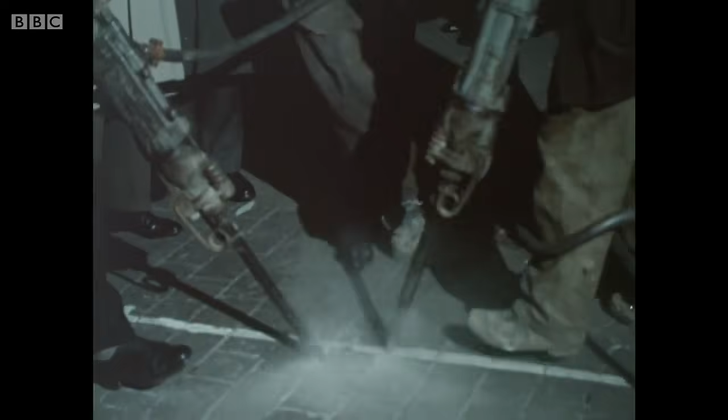With the first bite of the pneumatic drills, the TV cameras were rolling. But that night in Oxford Circus, only a small crowd looked in. It was the weekend, most people were out of town. And the models who saw it all, in the fashions of 6 years ago, couldn't talk.

So an operation began which had been on the drawing board for 18 years. It was, of course, raining. This was D-Day.

The Tube is a bit of London's pride that's been handed down to us. Back in 1863, when London pioneered underground railways, it was properly the wonder and admiration of the world.

It still might be in 1969, if there weren't so many of us. Too many people for the system to digest. No strap hanger, and none of the rush hour crowds pressing wearily over the pavements above, needs telling that today the Tube is bursting at its seams.

It's the same problem which London, paradoxically, has inherited in the drainage system. But in this overcrowded metropolis, we have a national tradition of adventuring against difficulties. In Victorian times, the great engineer Sir Joseph Bazalgette enclosed the Thames inside the embankment and built the main sewers to support 4.5 million people—essentially the same system trying to cope with 10 million today.

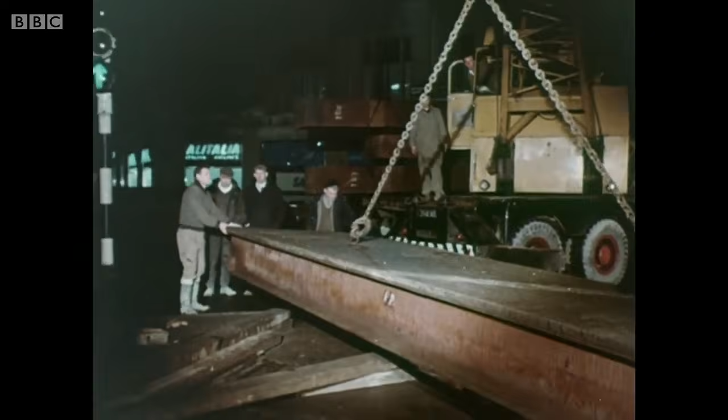In the 18th century, we established the canals, waterway roads. In the 19th, we led the world with iron horses. In the 20th, the technological age, it may be that the descendants of the Industrial Revolution are not so unworthy after all. Look at this, London.

Here's the plan, conceived decades ago, to relieve the indigestion of London's traffic by tunnelling a new tube line from Victoria to Walthamstow. Twin tunnels of 10.5 miles to link 4 mainline termini—Victoria, Euston, King's Cross and St Pancras—to slash right across the existing system and bring the underground to a new region in the northeast.

By any standard, it was a hell of an undertaking. No one knows all the secrets which lie under London's streets.

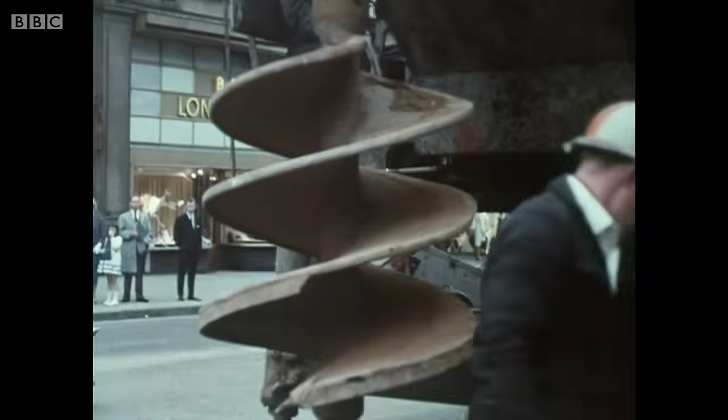The advantage the new pioneers had, in place of the picks and shovels, hammers and anvils of their forebears, were the machines of modern technology. But when the first great drilling rig arrived for the start of the work in Oxford Circus, one of the belly buttons of London, it was still the beginning of another brave adventure. In the autumn of 1962, the first phase was something of a small miracle.

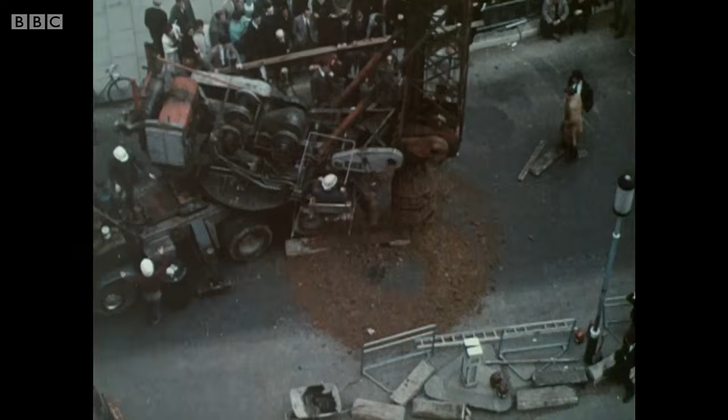Before they could begin mining underneath, they had to erect an umbrella, a steel overpass for the traffic streaming overhead from the 4 points of Oxford Circus.

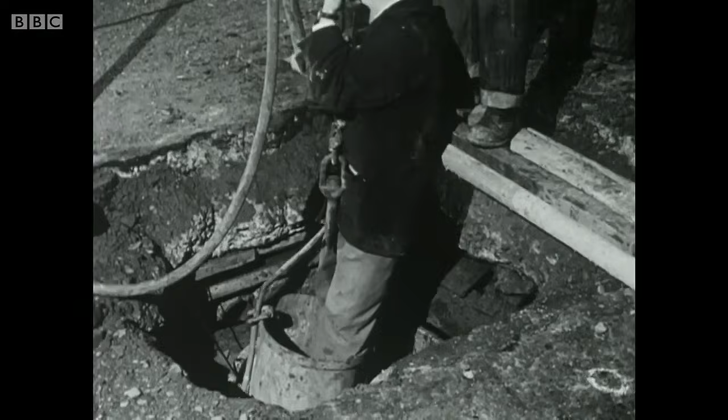For 60 years, a period as long as Queen Victoria reigned, rarely had anyone probed deep into the guts of central London. No one was even absolutely sure where all the power cables, gas mains and sewers were sited. Some went even unmapped. But engineers playing with the stuff of the earth have to be gamblers.

Gamblers with a system, but keeping their fingers crossed every time they go down for an inspection. 25 holes had to be drilled and filled in 18 days, 3 feet in diameter, up to 50 feet deep, to get a footing in the London clay.

As they were completed, the boreholes were sealed. Oxford Circus was almost ready for the opening of its steel umbrella.

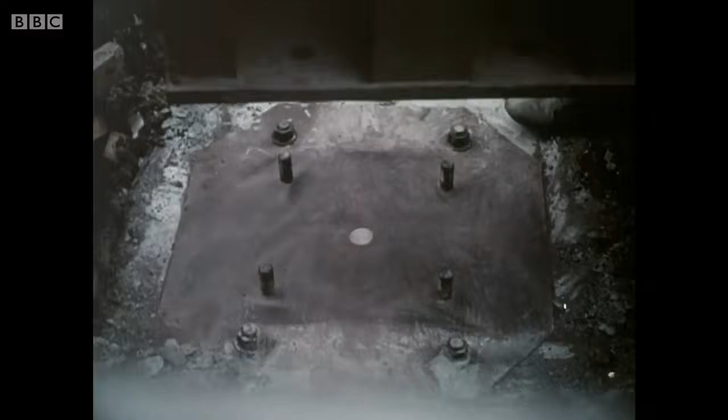To the outsider looking in, it all seemed chaos. Civil engineering usually does. But in fact, brute force and the muck of it is combined with a pernickety and almost an embroiderer's precision. Isolated in an island of noise, encompassed by the swirling West End traffic, the surveyor and his assistant worked with the calm concentration of an operating theatre.

They had to. The steel deck sections had to fit together without nuts, bolts or rivets, like a jigsaw. Otherwise, it would be a spillikins. They got it right to fractions of an inch.

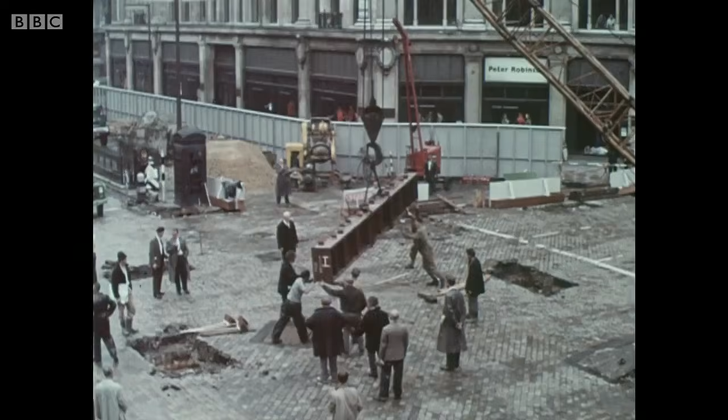Came that August bank holiday of 1963, when traffic and pedestrians were diverted. On the Saturday, the steel parts of the new umbrella, colour-coded and numbered, were ready. The target was that Oxford Circus had to be open for traffic by 6:30 a.m. on the Tuesday. Here's the story of a mere 65 hours.

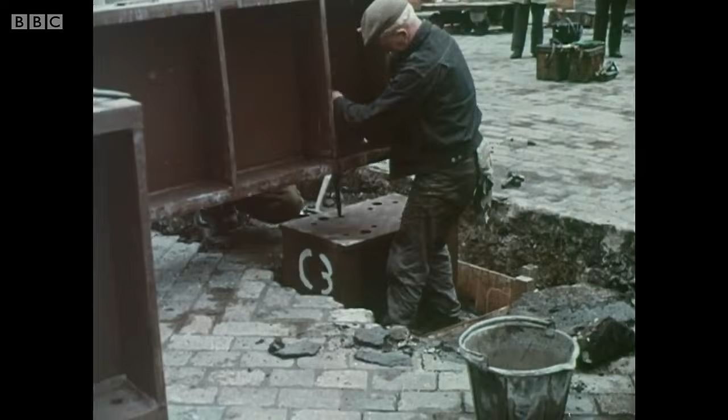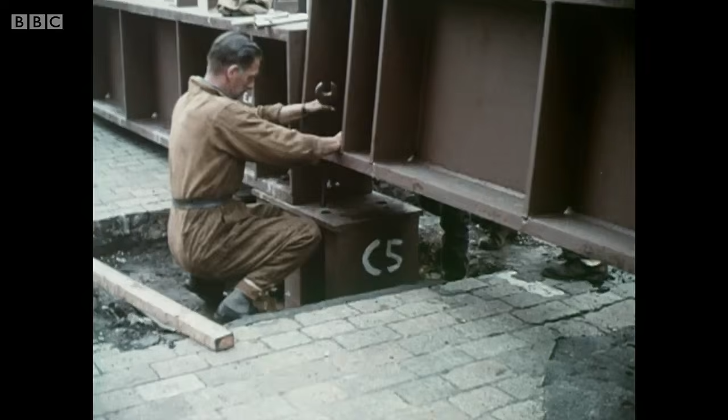The first girder went into position at 3:20 p.m. on the Saturday. Later that afternoon, the centre rib was nearly complete. At 7 o'clock, the first deck section went in.

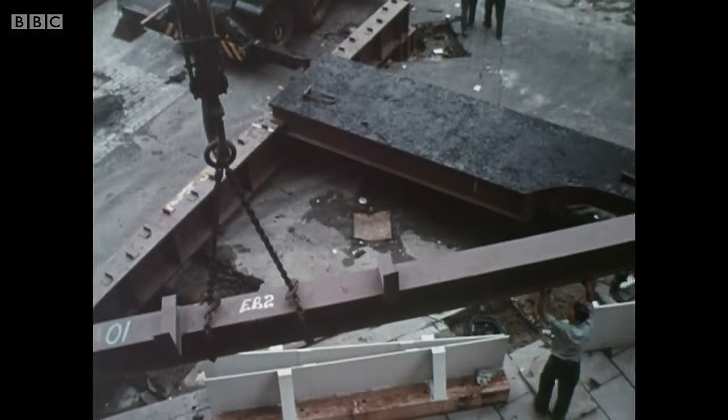The night shift took over, and the sections continued to fit. On Sunday morning, 11 a.m. exactly, half the umbrella was complete. 43 hours to go.

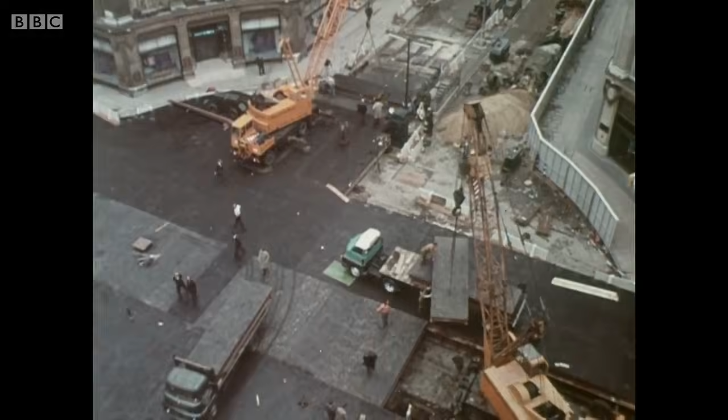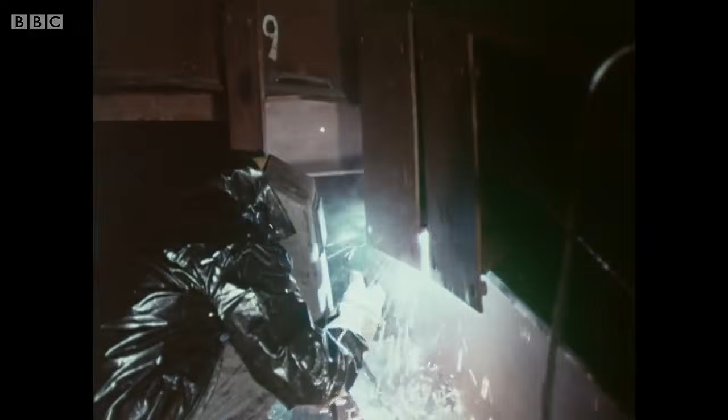Sunday night, 30 hours and 40 sections to go from midnight. The one that doesn't fit has got to be this one. It's the last, and it does. 245 units in position in an average time of 11 minutes each. Just after midday on the Monday, with 18 hours to finish off the details, it was all over, bar the congratulations.

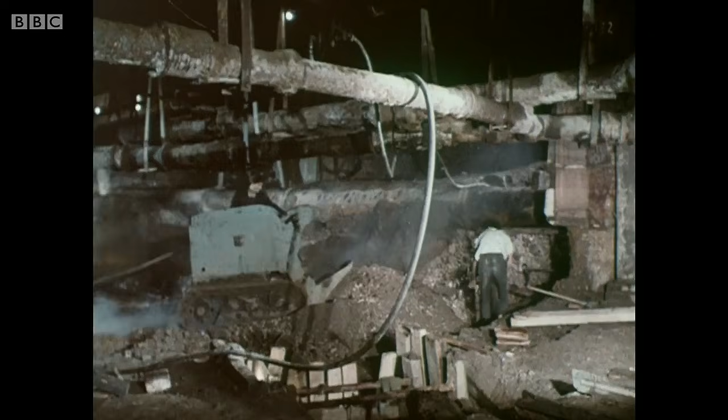Under the umbrella, with the traffic swarming overhead, this is what they found: a maze of pipes and conduits, power lines and drains. Just 2 feet 6 inches under the road surface, London spilled over like a plate of spaghetti. From London on top to London underneath.

While they got to work at Oxford Circus, constructing the new ticket hall, escalator shafts, stations and subways, all along the line, men and gear were lowered down working shafts dug to tunnel depth. They did their shifts in small gangs, 70 feet below the surface, in a secret, sweaty world of their own. Like moles, they tunneled towards the next gang along the line.

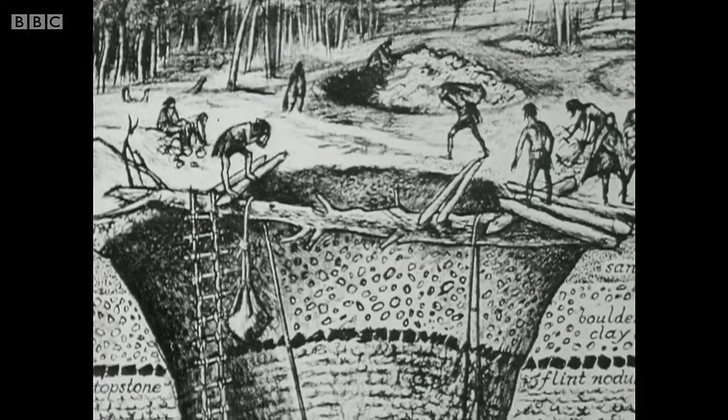Nothing new in man's instinct to tunnel, mucking out mud, shifting soil to the surface. It's been going on since the Stone Age. It's just that the methods have changed somewhat, the costume. The Stone Age tunnellers at Brandon in Suffolk used the tines of deer's antlers to scratch flints for their arrowheads out of the chalk.

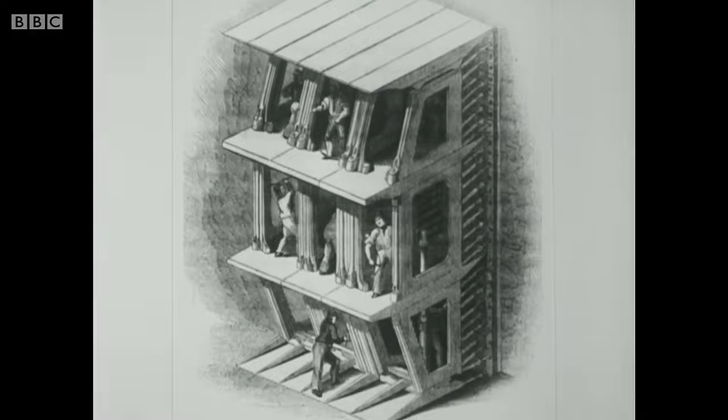Tunnelling through London clay with some sort of digging shield has been practical since 1825. The first one had 12 frames side by side with 36 cells, in each of which a miner worked at the face. We've advanced since then.

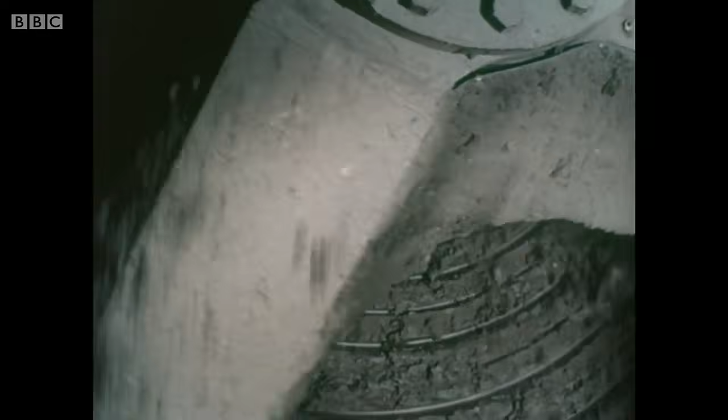A gang of 6 men working a modern rotary digger can clear a running tunnel through the clay at the rate of 2 inches a minute. The machines, lowered down the shaft to be assembled on the working site, can steer their tunnel accurately within a tolerance of 1.5 inches. They cut exactly to the diameter required for the passage of the trains.

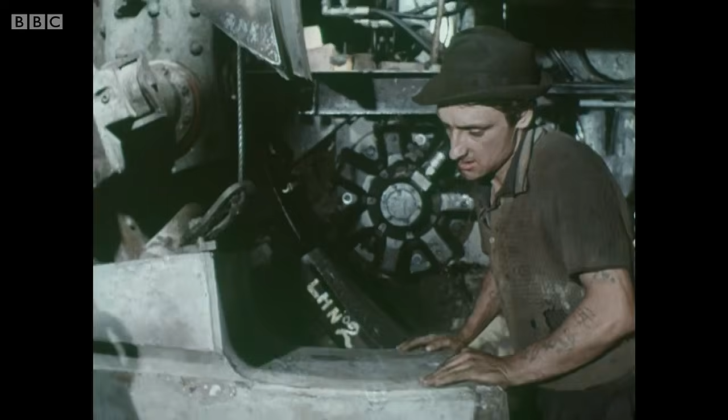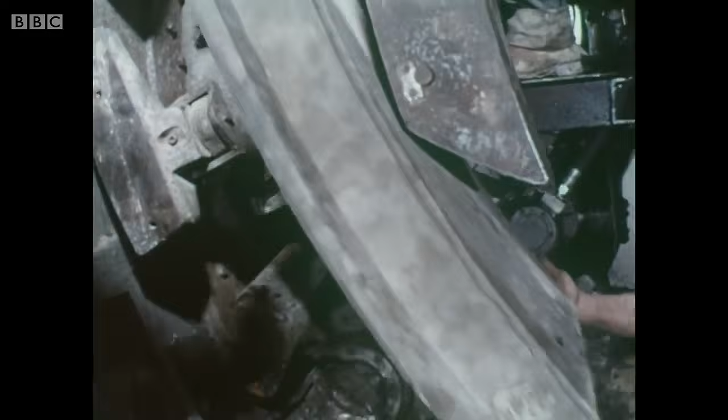London clay, famous in tunnelling history since the 1890s, is the ideal medium in which to build a new tube railway. But it isn't self-supporting for very long, so the tunnel lining ring must go in quickly behind the digging shield, 1 lining ring every 2 foot advance. Once every 15 minutes, the miners assemble a self-supporting ring of concrete behind the digger. No nuts or bolts, they just pack the segments under power and pressure into place.

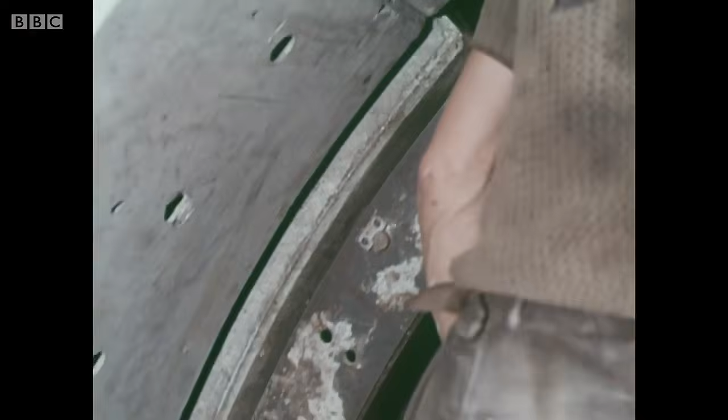The miners are specialists, working as a team, in demand the world over where there's a tunnel to be dug. They stick at it for 8 hours a shift, sometimes working 2 shifts in succession, so that they only have to have 1 bath for double money. They earned a lot of money, and they sweated their skill for every penny of it. Think of them when you yourself are riding in comfort through the shotgun tunnel of the new tube.

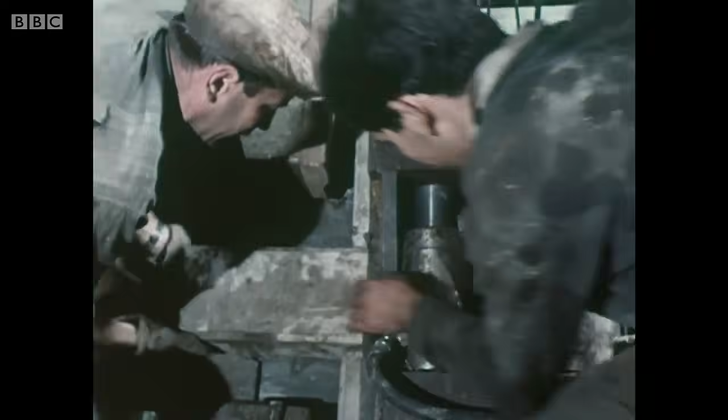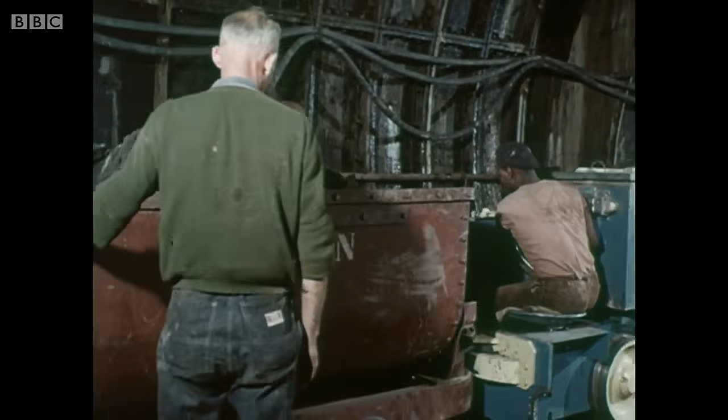Behind the shields, cutting the tunnels, there are long sleds and belt conveyors to get rid of the spoil. If you dig a tunnel, as any rabbit knows, you must get rid of what you kick out of it. Muck, that's what they call the clay, comes out fast. Skip trains haul it away from the diggers and a belt conveyor to the surface.

Where does it all go to? It's being dumped in worked-out gravel pits, in clay quarries, and even used to make bricks. It's probably true that what makes the land of Britain has been pushed about by industrious humans more than any other country in the world.

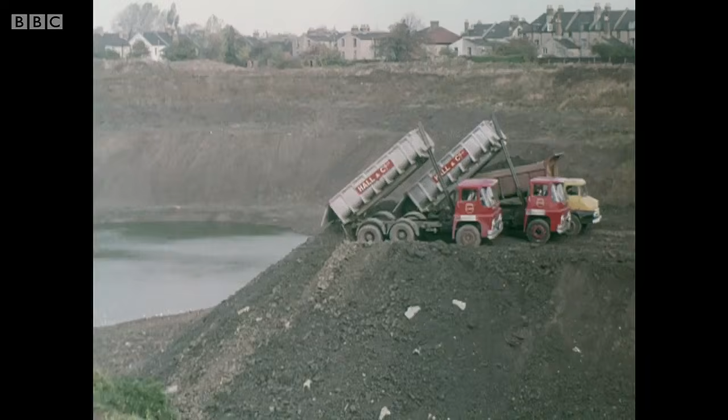And there's why we're doing it again. Underneath, the miners are clawing at the tunnel face to make a new artery for London. The first breakthrough, the meeting of 2 tunnels, is coming about.

The engineers, those cool men, are satisfied. Somebody else seems rather pleased with the result.

Running tunnels are best cut with mechanical diggers. Big diameter tunnels with cast iron linings are dug more economically by hand. Stations have big diameter tunnels.

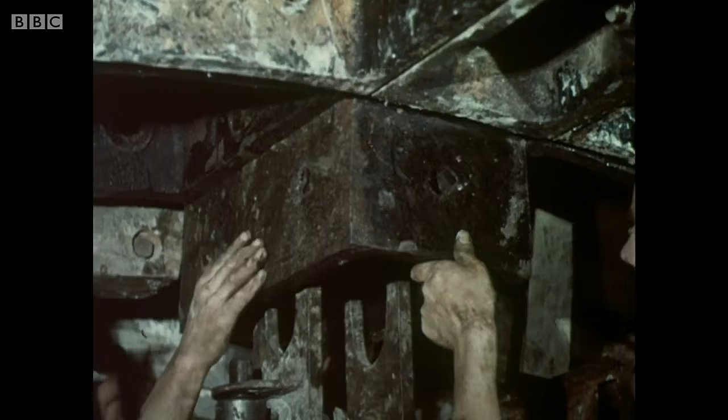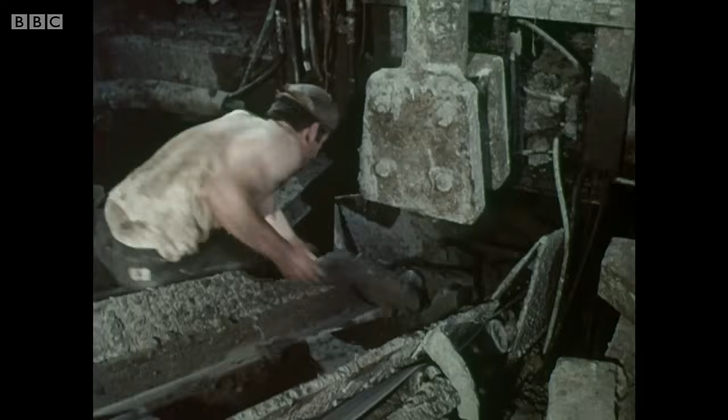Where did they come from? Where have they come from so often in the story of these islands? Sons of Ireland, almost all of them. Descendants of the formidable navvies who dug the canals and laid the railways. The men who astonished Europe when the canals were cut in the 19th century by cooking steaks in their spades over their bonfires. Back again, better paid, with pneumatic drills to help, to mine the new Victoria line. Men with big appetites, mighty thirsts.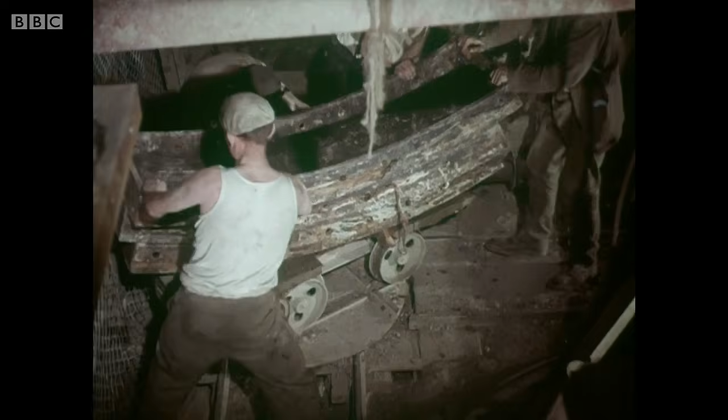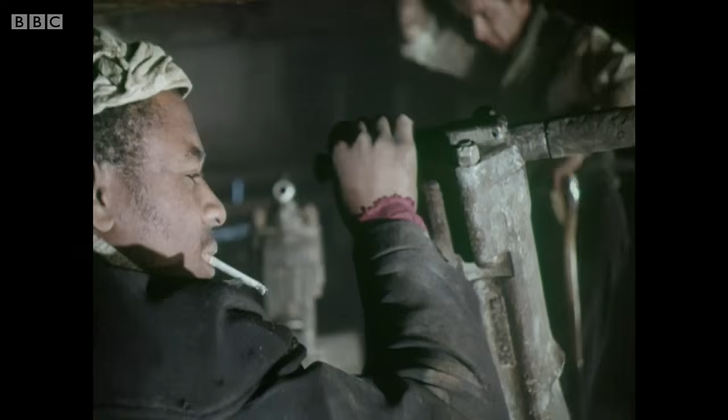It wasn't all plain sailing. While London slept, at a weekend in October 1965, a diversion was necessary at Finsbury Park to make life easier for future Victoria Line passengers. As a tremendous concession, the engineers were given 15 hours without trains to effect the changeover. The last train of the night went through, and the passengers caught a fleeting glimpse of what was in preparation.

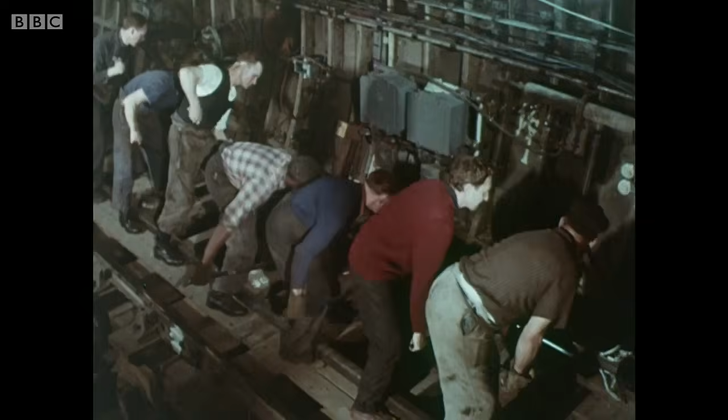An army of men ripped up the rails and sleepers. Old track was levered away. All hell broke loose. Right then.

Temporary craneways, built specially for the job, lifted the awkward loads onto wagons, which carried them away down the old tunnel. Every man on the operation was briefed exactly what he had to do. Millions of commuters would have asked the reason why, if anything had gone wrong.

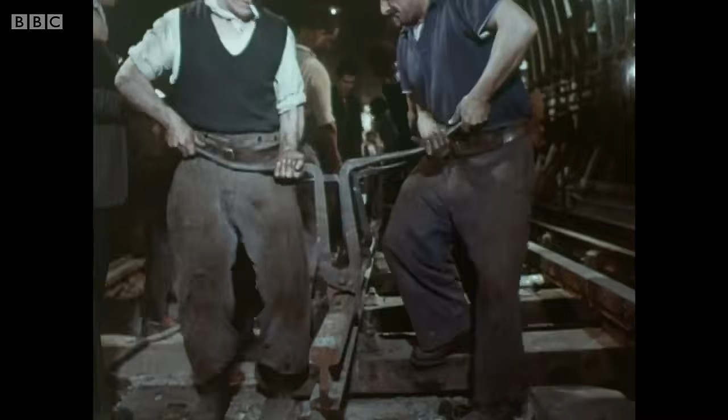But early that Sunday morning, the commuters were at home. Every move was meticulously timed. Old track removed, new track in readiness, new signals in the process of installation.

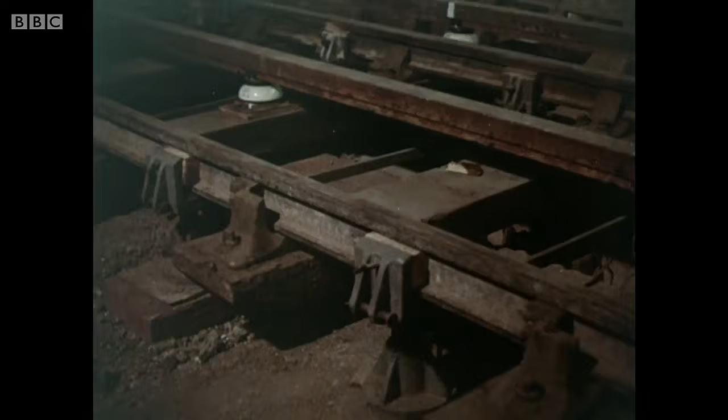What they did that night reminds me of the miracle of improvisation which was achieved on D-Day in the war. Apparently, we haven't lost something of the drive, at any rate, that we had then. Today, as always, we're much too inclined to blame ourselves for what we failed to do. But this was a neat bit of work, even if it was only a little bit, to divert an underground railway from an old line to a new one in 15 hours. The first train came through as scheduled on Sunday afternoon.

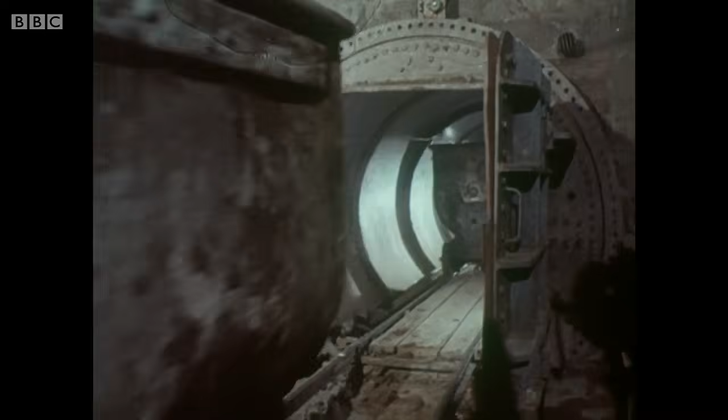Have I made the undertaking sound too predictable? It wasn't. Although London clay works well enough, the blue carpet underneath has holes in it. One of them is at Euston, where the line goes down to beds which are as waterlogged as a wet sponge. To prevent the water squeezing through into the tunnels, the workings had to be sealed off. High air pressure kept back the water until the work was done.

It was like an episode in Doctor Who.

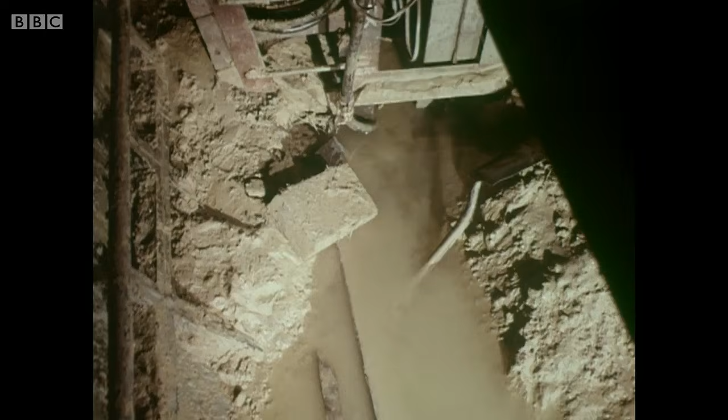But the engineers had anticipated all this. What they didn't expect happened in September 1964, under Green Park. A tunnelling shield working in the clay ran into an unknown pocket of water-bearing gravel. They had to dig the rig out. The wonder is that in a vast engineering undertaking, an investment of £70 million so far, that was the worst that happened.

There have been few comparable engineering achievements so bold and at such a small price in human terms.

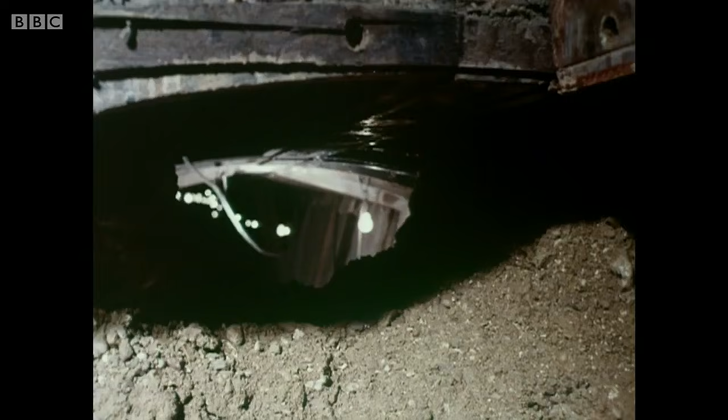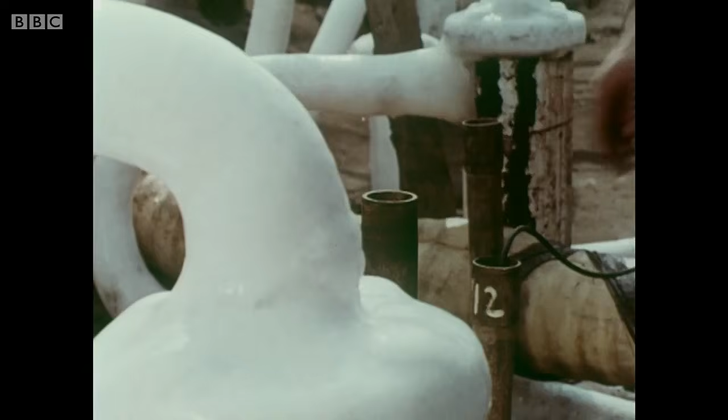During the hottest summer weeks of 1966, the engineers knew exactly what they were up against. At Tottenham, the ground was so wet that even in a heat wave, they had to freeze 500 cubic yards of it so that they could excavate and line an escalator shaft. If you have a scientific bent, liquid nitrogen was used, 350 below freezing point Fahrenheit.

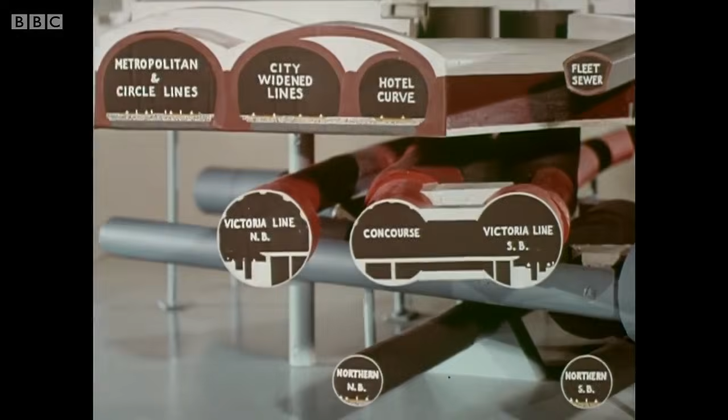King's Cross was another cross to bear. Railwaymen know it as the menagerie. The reason why is that so many systems above and below each other converge here. Through main lines from the Midlands and the East Coast. Cut and cover underground railways. The Met and the Circle, the Hotel Curve and the widened lines. Deep tubes too, the Northern and the Piccadilly. King's Cross is riddled with railways.

The Victoria Line, the newcomer, has been threaded through the eye of a needle. To get it through, an under and over job, without old tunnels collapsing or lines distorting, specially strong tunnelling shields with more than the usual number of rams were used to support the clay at the face. The new tube station was lined with steel rings instead of cast iron, and the stresses arranged so that they reached not into other tunnels but into virgin ground.

The result of it all? Well, King's Cross still stands where it did.

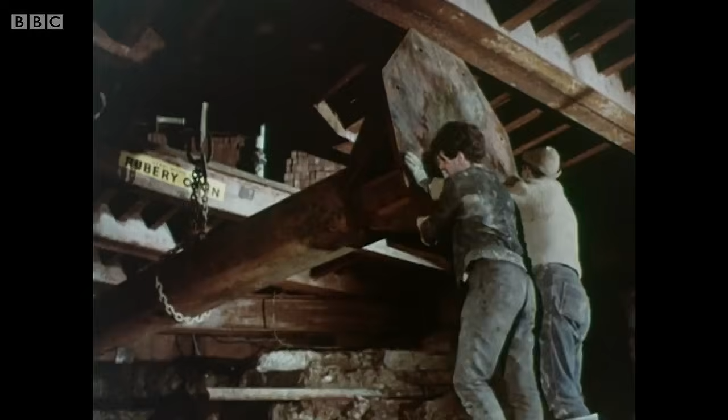The crowds milling around Oxford Circus tube station while the work was going on had cause to wish the place to the devil - too many people, too many no entries for comfort. Passengers on the Bakerloo and Central lines, on their way to work or travelling back home, occasionally had a glimpse of what was going on. They themselves could scarcely have been expected at that dusty time to raise a cheer, but they might have done if they'd known more of what was being tackled. It was a smuggling adventure, getting stuff down in the night time when people weren't looking, putting it into a place within a few feet of the feet of Londoners overhead.

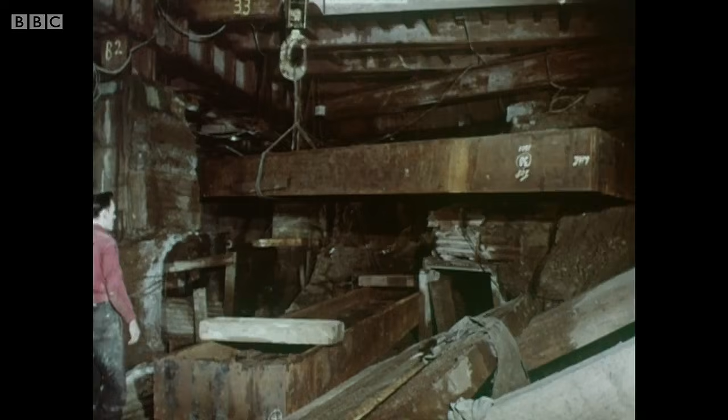Just how difficult an adventure was the challenge which faced the miners of the Victoria Line when they got to the point where there was a store sitting on top of them. The southbound station tunnel had to support the weight of Peter Robinsons - hats, dresses, tights, undies, and all. The store has 3 basements. While the women were admiring themselves on top, the miners put a concrete raft under their legs underneath. Bread and butter work for engineers, working in tight holes underground.

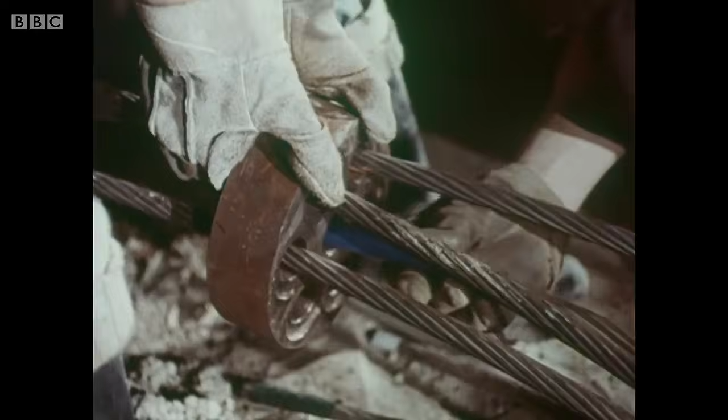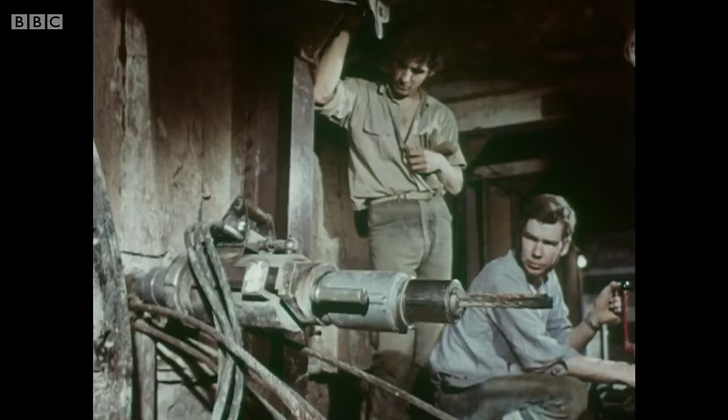Two worlds. Up above, where everybody feels as safe as houses. Down below, where they carry buildings on their shoulders.

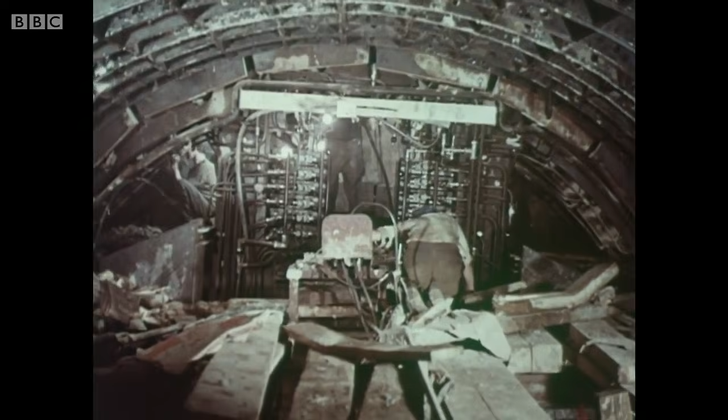In November 1965, the diggers on their way south reached the concrete raft and skimmed safely underneath it.

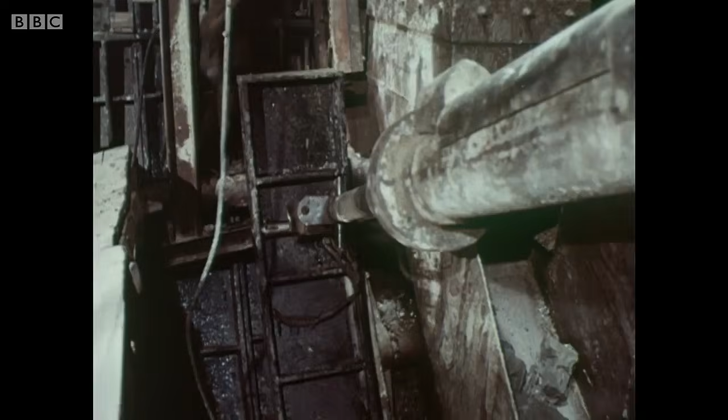A major engineering undertaking was developing under Oxford Circus. Unbeknown to most of us on top, in the isolated underground world, a new bit of London was in creation. London, which has never stood still, was advancing again.

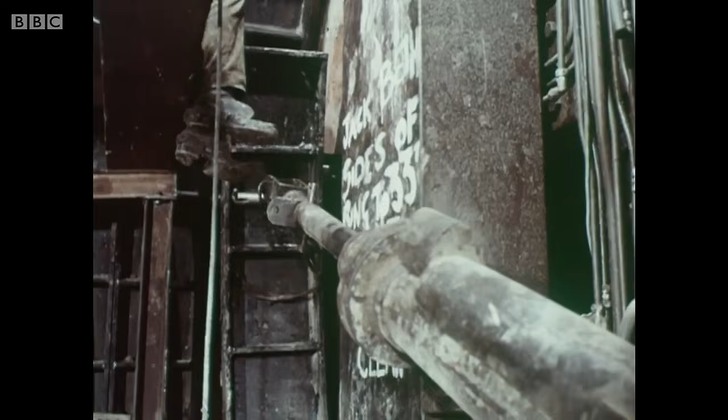In September 1966, a moment of tunnelling history - the final breakthrough under King's Cross of the new Victoria Line. There were no celebrations. Shades of the Forth Rail Bridge, or Brunel throwing down his hat to mark where Swindon would be on the Great Western Railway.

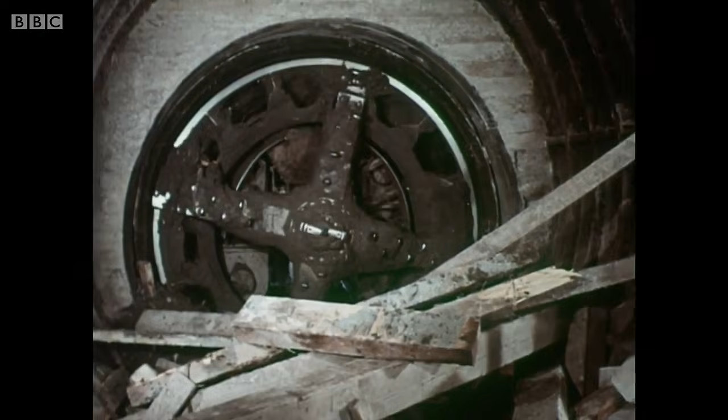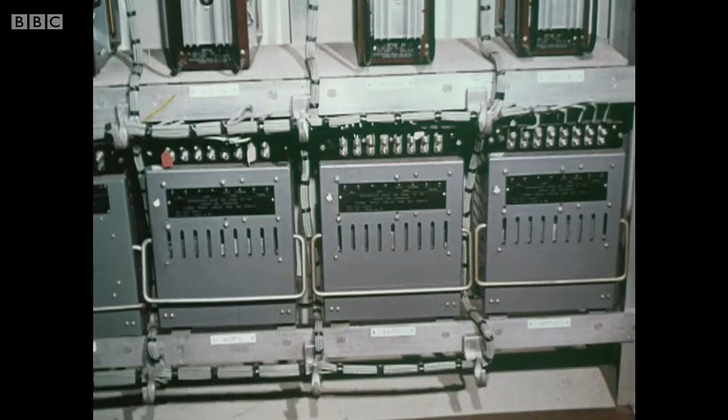While the line was building, they tested automatic trains. All the driver has to do, apart from opening and closing the doors at stations, is to press twin buttons to start. The machines do the rest - coasting, accelerating and stopping, the train looks after itself.

In fact, the drivers could have been dispensed with, but it was thought that the public would be unhappy without the sight of an official with manual over-control on board. In truth, the Victoria Line, all its trains along its whole length, is ordered by a couple of men in an operations room by Euston, and even they don't have to interfere unless there's a technical hitch. The driver is in telephone communication with them, and has a public address system to talk to passengers. But, well, all he really has to do on the Victoria Line, I could do myself, and have.

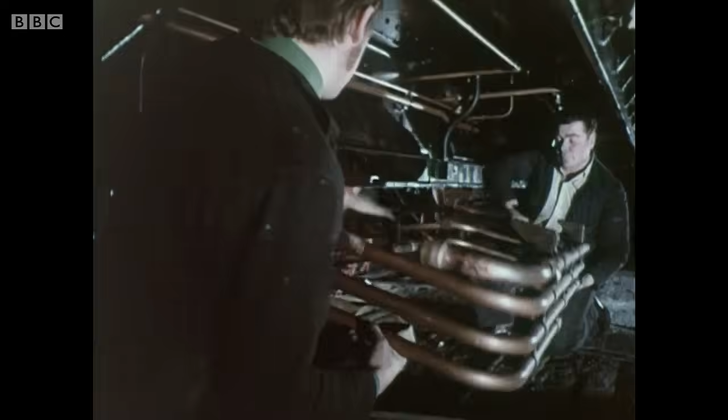Obviously, London can't take all the credit for the new line - the achievement is truly a national one. The electrical equipment was made in Manchester, the rolling stock in Birmingham, the concrete lining segments of the tunnels in Essex, cast iron for the stations and tunnels in Nottinghamshire, Teesside and Glasgow. This isn't just London's, it's ours.

Ever thought what you're sitting on when you travel in the tube? In the experimental phase, they didn't forget the passengers - iron ones, patient, uncomplaining and heavy, 20 stone each, provided a simulated rush hour load for braking and acceleration checks. Each experimental train became a mobile laboratory, driven manually and under automatic control. Boffins studied performance, satisfying themselves the way boffins do, with graphs, slide rules and tape measures.

They checked how trains would brake in the rain - a precautionary provision in our climate, but hardly necessary, I should have thought, in an underground. Still, you know what boffins are. Enough that they passed us, trains and iron passengers fit for service.

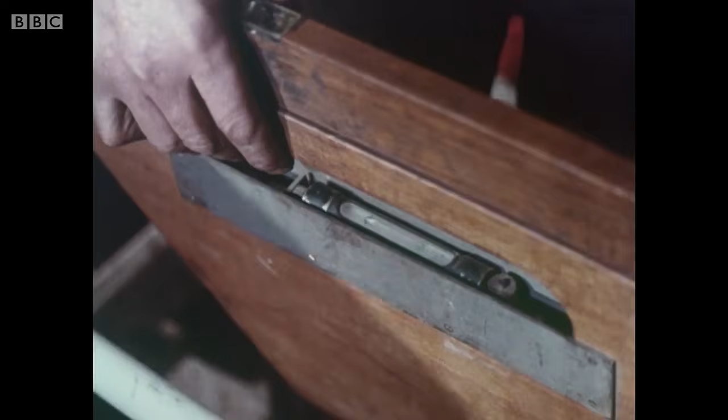The wonder of this operation is that they have to sneak all the heavy gear they need, the rails and the sleepers, down deep working shafts. Because there are only inches to spare for the trains in the running tunnels, the track has to be laid within an accuracy of 1/16 of an inch. Next time you're in a tube, if you're a Londoner, probably tomorrow morning, notice what a tight fit in the tunnel the train is.

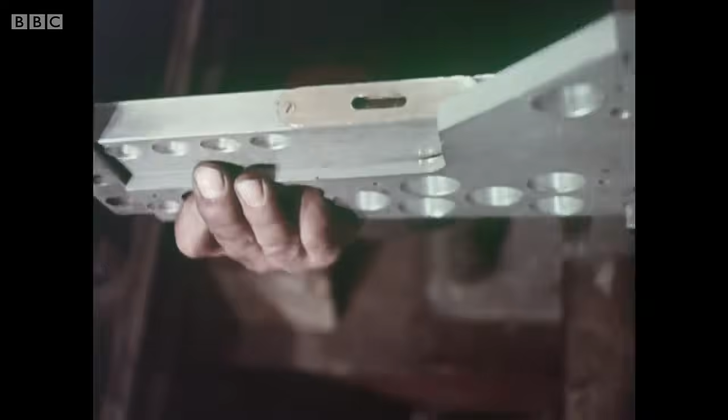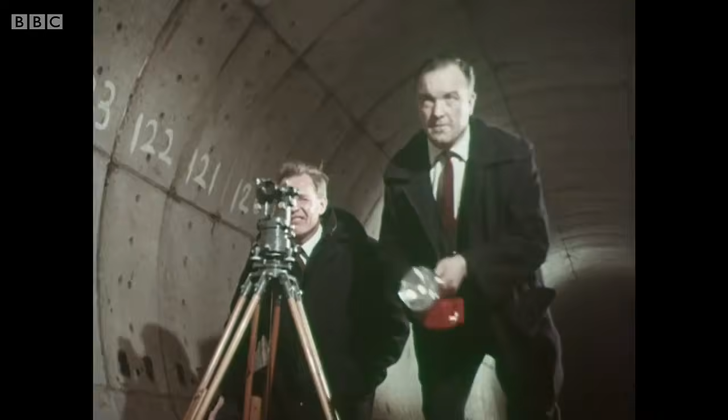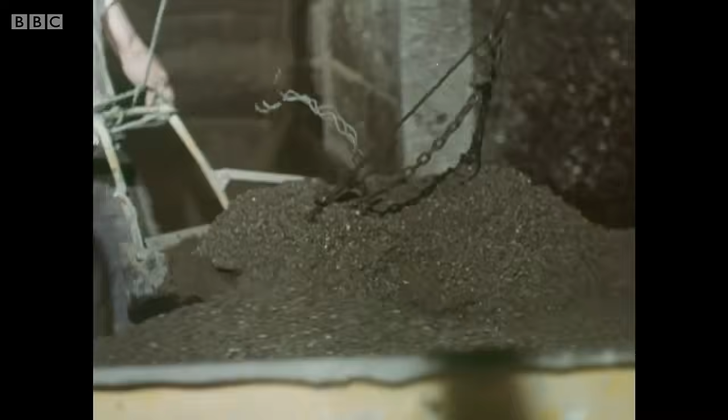Nothing new about a cement mixer. What was new is that it becomes more difficult to install and operate when the stuff for the concrete has to be lowered into a netherworld and mixed in a plant which in turn has been humped to the bottom of a working shaft. Millions of tons of concrete were needed for the bed of the new line, all to be shifted load by load through the complex of new tunnels.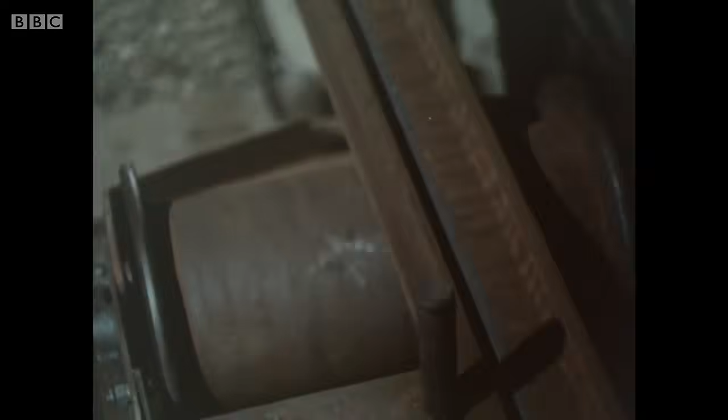Just laying the rails called for novel methods. In 300-foot lengths, they were brought to the working sites in special battery-driven trains. They are highly flexible and quick to lay. At the forward ends they are chained to the track, and the train, moving slowly backwards, squeezes them out like so much toothpaste into rough position. Then it shoves the flexible bars inch by inch into their chairs, as the engineers term it, and they're secured. You've got to give full marks to work like this. What an ingenious animal man is.

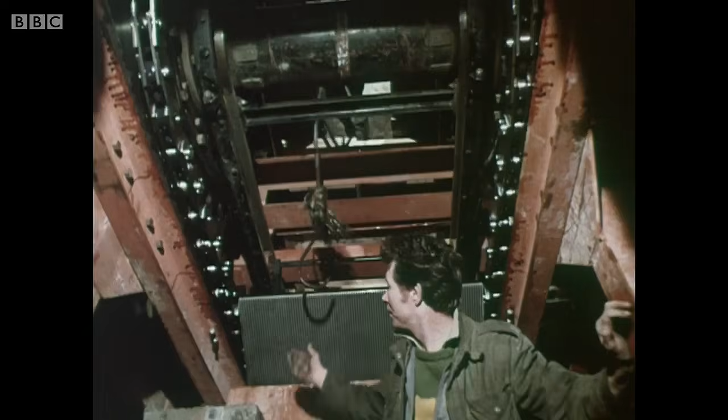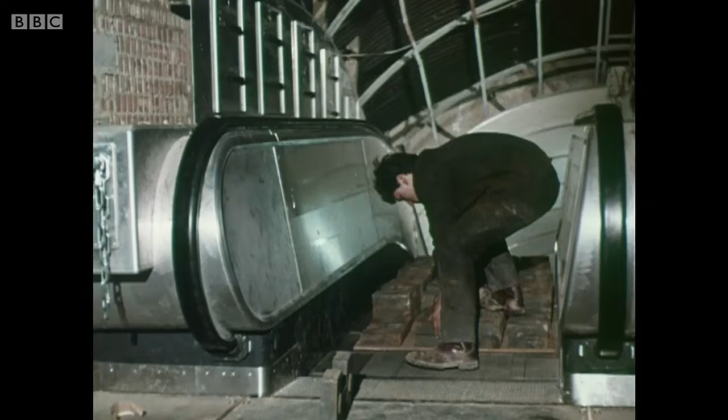Rails for trains, escalators for people. The Victoria line has called for 42 new escalators. When London's first moving staircase began to run at Earl's Court in 1911, a man with a wooden leg, nicknamed Bumper Harris, was employed to ride up and down all day to show Londoners how safe and easy it was. Londoners don't need reassuring anymore, but the engineers do. Working on full load, 1.6 passengers per step, 5 tons on 50 steps, the escalator must stop in an emergency within 4 feet 2 inches average. It does, but carry dogs and fold your pushchairs.

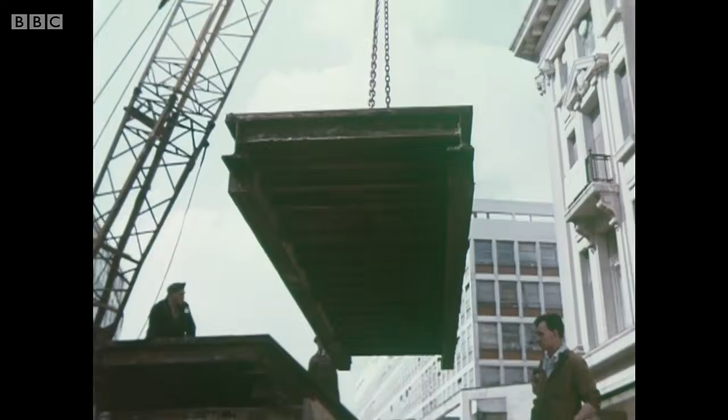After nearly five years came Easter 1968. While the rest of us were on holiday again, it was time at last to fold the umbrella over Oxford Circus. They folded it so fast that time schedules went for nothing. The traffic rolled again, but not over the old Oxford Circus. A new wonderland had come into being underneath.

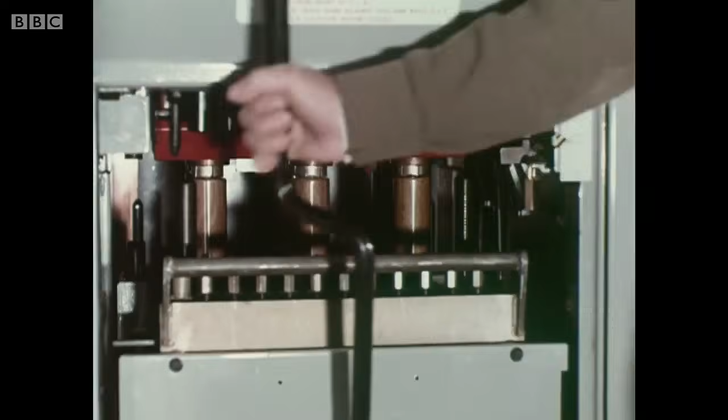You can call this lighting up time. When the hour came last year to open up the first sections of the new line, the signal went to Lots Road to switch on power. An exciting moment for the electrical engineers. They'd done their homework, but they wouldn't have been human if, when the signal went to check, they didn't stand and stare.

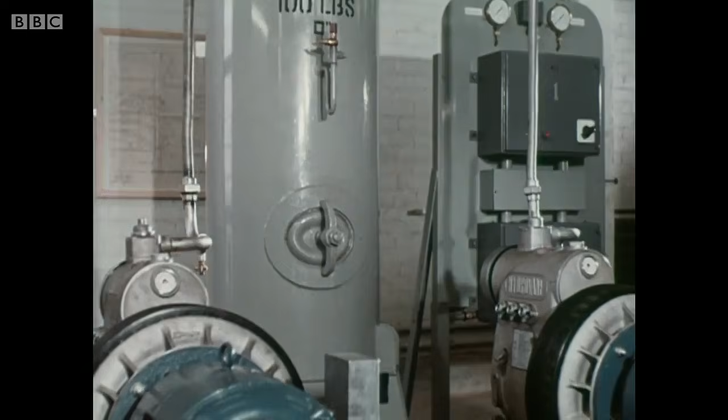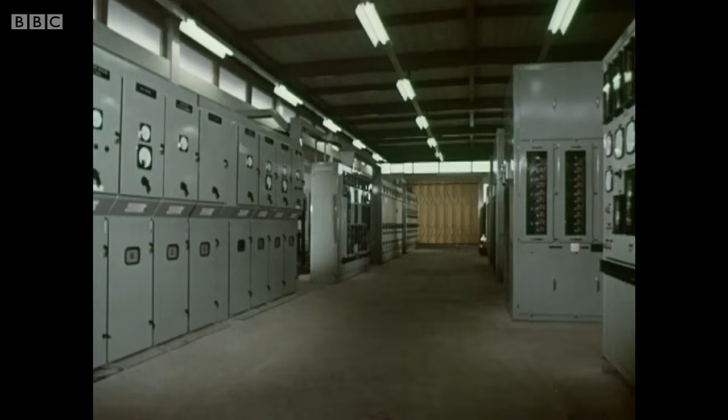Along sections of the line, not yet to Victoria, other power was on. The pattern of automated transport after years of work was emerging. This is the road to the world of the 70s. Regret the past if you like horse-drawn traffic, but this is where we're all going. No hands.

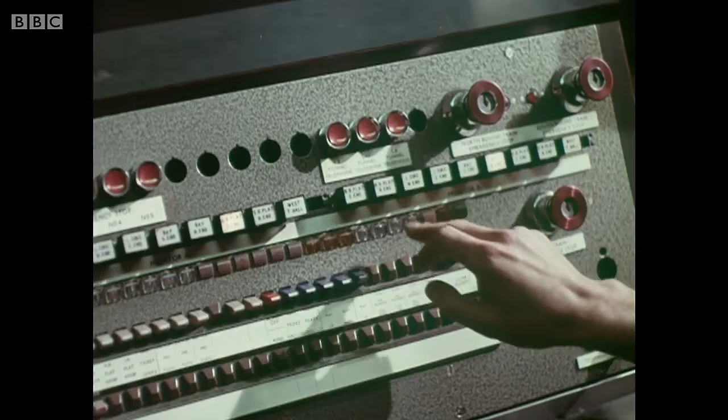Most people on the platforms don't know yet how closely they're being watched on television screens in master control offices. The girl doing her hair doesn't know yet that it's a two-way mirror with a view from the other side. Not quite Orwell's 1984 or Aldous Huxley's Brave New World, but here it comes, inexorably, unavoidably, inevitably. The machine is beginning its rule. A network of interlocking machines throughout the Victoria line gives communication at the speed of light.

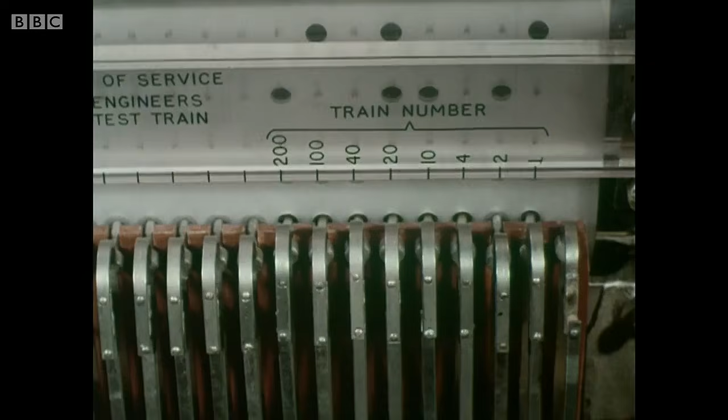What we used to call a pianola, a punched strip playing the piano for people who can't play the piano, programs the traffic operations day by day of the whole line. Memory banks, automatic traffic signals, spindles and levers show the way. A complete week's programming is on one roll, and it clicks forward from one day to the next.

In the rotunda control room for the whole of the line, two men effectively watch how every train moves, how every passenger moves. With their monitor screens to watch station traffic, telephones to talk to every driver, this is the most advanced underground system in the world. A marvellous contribution to London's traffic problems, a marvellous achievement by the engineers and contractors. To keep up with the modern world, London couldn't have produced anything better than this.

But think, this is the way we are all going in the automated age. The automatic barrier with magnetically encoded tickets is the new thing. Regret for the bumbling old world of the past? A waste of time. We are for the future, and if we can't live with it, we are for the past.